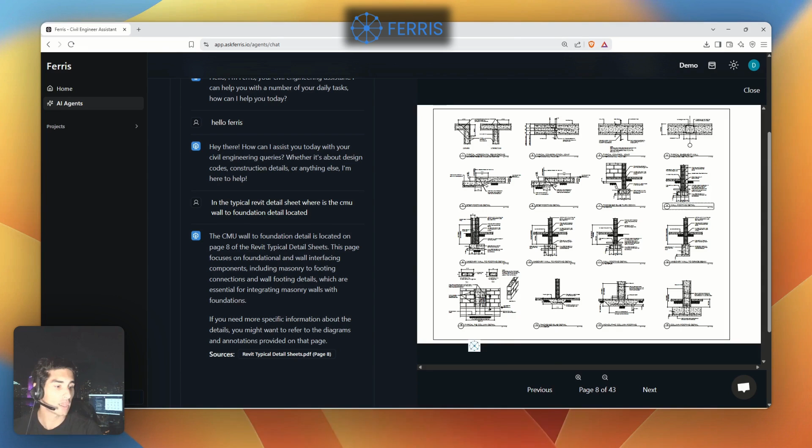If this is not correct, You can click on the link, and it's going to pull up side by side the PDF and where it received this information from. And then you're allowed as the user to go in, and you can see right here, here's our masonry wall to footing detail. And you can go and investigate more.

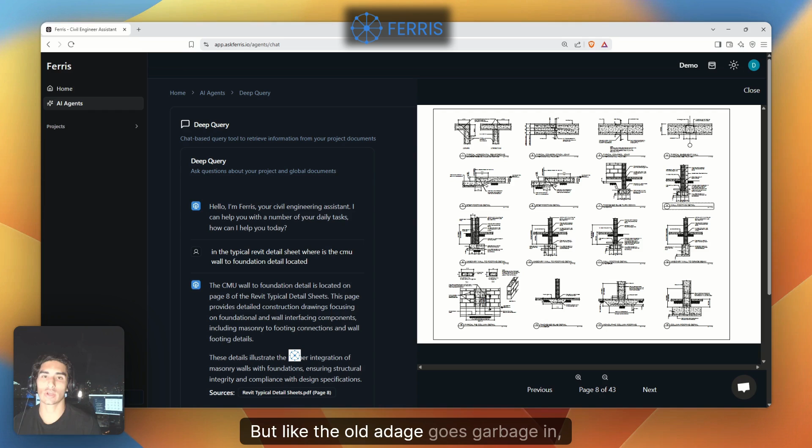So something else that's very important is how we prompt Ferris to retrieve our information. So what you're telling it, how you're telling it. I'm going to be putting out more content and explaining to you the nuances of prompting, but like the old adage goes, garbage in, garbage out. So the more detailed, the more direct you are with your prompts, the better quality of information you're going to get back out from Ferris. So something to keep in mind.

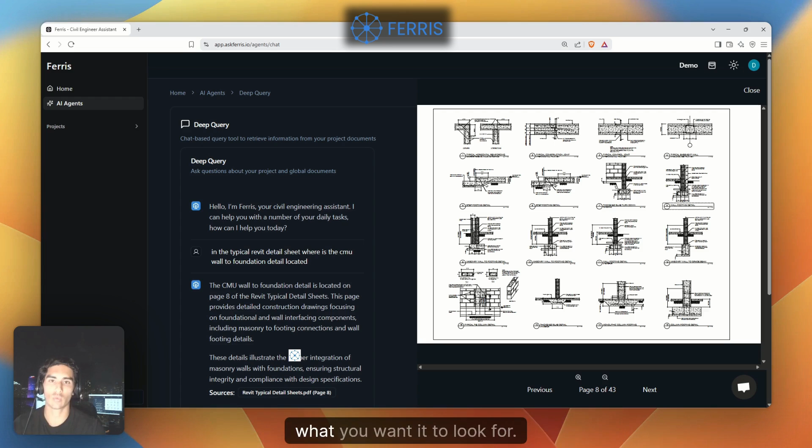You can kind of chat with it casually, how I'm chatting with it here, but it's not the best way to interact with it. You can give very long paragraph explanations of what you want it to do, what you want it to look for, and in those cases, we have the highest rates of accuracy and success.

So the other day I was trying to design a column splice, and I was looking for where in the AISC manual it spec'd out column splice specifications, guidance, things of that nature, just to brush up on to make sure that what I was doing was accurate, to code, correct. So I put in this question: hey, I'm designing this column splice. Where in the AISC manual can I find this? It gives me a few different places to go look.

It's telling me on page 1405 it provides general guidance. So we could hop into there, and if you wanted to read some general guidance, you can go about it that way. Then there are different types. So if we have different design requirements, we can go to 1408, and we could take a look at the splice information that's provided here.

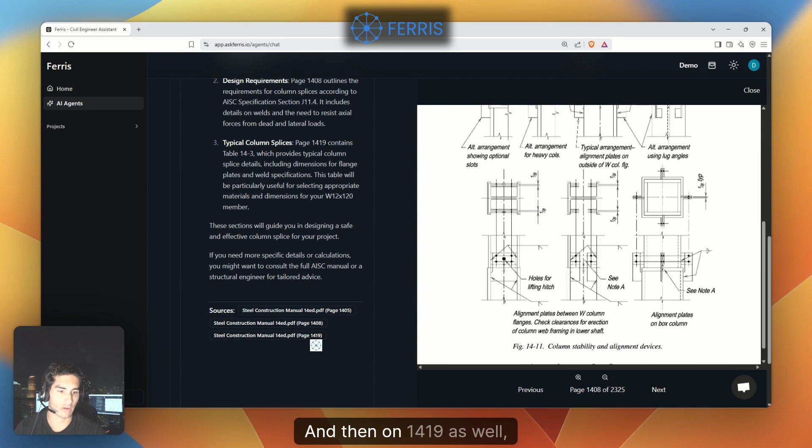And then on 1419 as well, you can go and take a look at the tables for typical column splices, different types of plates they'll recommend, different types of weld sizes they'll recommend, to really get to the information that you're looking for, again, as quickly as possible and as accurately as possible.

We want to get you the information that you need to design, to put drawings together, to answer RFIs as instantaneously as possible. We should not be wasting time Control-F-ing our way through documents, flipping through pages of design codes. I really think it's important for us to increase our bandwidth as civil engineers, that we start to adapt some of these tools, some of these technologies into our daily workflows.

So another real life example of how I've used Ferris professionally was the other day I was working on a project, and a contractor calls me about a separate project, asking me a question about a specific detail. So what I did was I went over to Ferris, I changed in the DeepQuery agent the project that I was working on. So when you jump in within a project, you're able to semantically search your project files as well as those global documents that we were working with before.

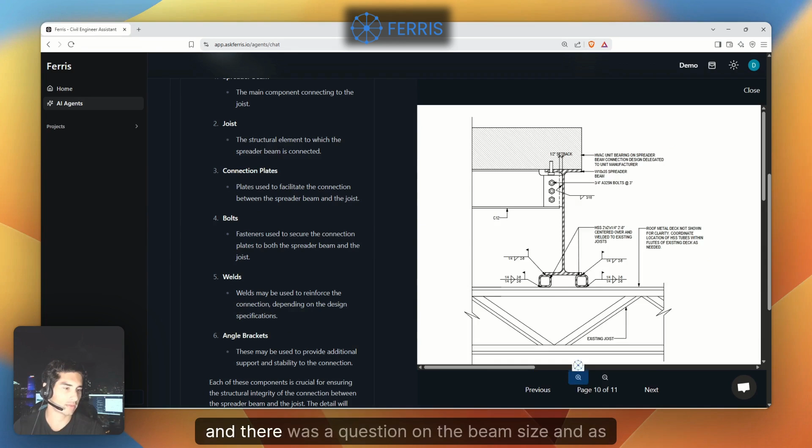So I quickly asked it a question about the detail that we were discussing, just so I could pull it up. I wasn't wasting any time jumping to that project PDF, trying to figure out what the detail was. I had it all right here at my fingertips, and I was able to speak to the problem at hand very accurately, very quickly. So I was able to pull up the spreader beam detail, and there was a question on the beam size as well as the welding connection that happened.

So again, very valuable, very useful in the sense that when you need to switch frame of reference to a different project, it's not going to take you minutes to find that document, upload that document, and then work in it. You could actually have all that here on Ferris, and all you have to do is semantically search that information to get to where you need to be.

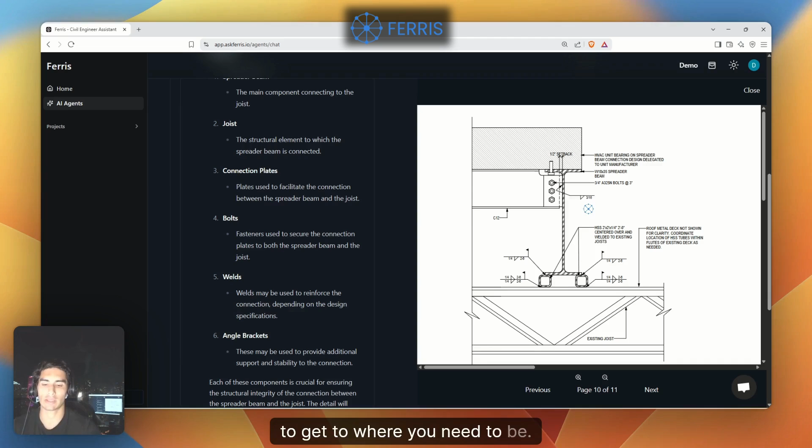So where Ferris could also help out with your design is if you're using any sort of catalogs to spec out specific products, read certain tables and output specific design information to you. What you can go ahead and do is I've got a Simpson catalog here. I'm looking for roof truss tie downs to CMU walls, and I'm looking for a specific uplift connection force constraint. So what I'm going to say is, hey, I need tie downs that withstand 1,100 pounds of uplift force. What types of attachments are going to work here?

And here it's going to spit out to you a few different options depending on your truss configuration and the ply size and that bottom chord. And the best part is it'll pull up the catalog for you in the location that you need. So now you can run through this yourself and you could start looking for specific types of tie downs that you might be using on your project.

Again, this works really well with like the Vulcraft roof decking catalog or the joist design catalogs. If you put in a bunch of variables that are your project constraints and you ask it for a specific member or assembly, it'll be able to provide that to you. So you don't have to go through and try to read through all the tables, read through all the charts. It'll be able to populate to you that connection tie down.

And the last thing that I would like to talk about here today is the process in which we charge for these queries and charge for these uploads. So if we go back to the home page, next to all your documents, when you upload them, there's going to be a column that says what the document status is. Is it a smart document? Is it not? What that means is when you originally upload a document to Ferris using the upload feature, it's not ingested and not embedded into a language model. In order to do that, you need to select the Make It Smart button. And what this is going to do is put this into a language model, making it smart so that you can query against it, you can talk to it, you're adding that level of intelligence to the document.